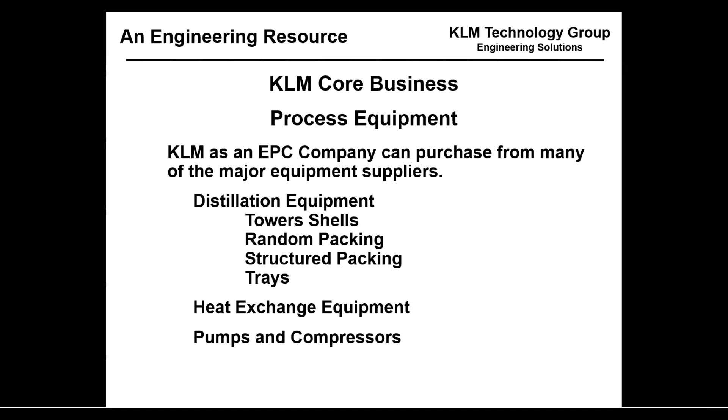Distillation equipment can be ordered with normal lead times or can be sourced for immediate replacement. KLM has a stock of random packing in Malaysia for immediate replacement. KLM has a stock of structured packing in Malaysia for immediate replacement. The shipping time should be short, and we also have some tray hardware in Malaysia, a stock of tray hardware.

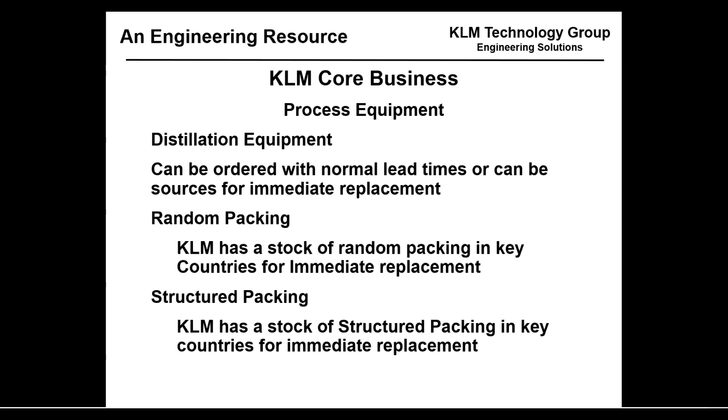KLM buys a large volume of process equipment each year because we buy many heat exchangers, pumps, and distillation equipment for many end users. Many times our cost to the end user is lower than they can negotiate themselves because the end user may be only buying a few items per year and the vendor adds a large profit margin.

Be sure and let KLM bid on your projects. We bid on a job and our competitor bid 100,000 and we bid 80,000 US dollars. They were 20% higher than us because they felt like the end user had no choice. So we were 20% cheaper than the competitor. Be sure and let KLM bid on your projects.

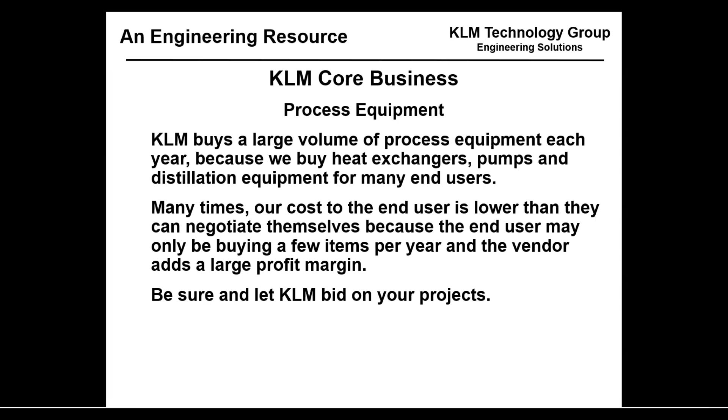Let's talk a little bit about distillation in general, and then we'll talk about random packing, structured packing, and then we'll talk about some distributors.

There are rules for which distillation device should be used based on pressure, flow, and fouling tendencies. For pressure, for high pressure applications, trays should be utilized above 150 psi, above 10 bars. Tray efficiency increases as pressure goes up, whereas packing efficiency decreases. There's a back mixing effect for packing at high pressure, so it's difficult to guarantee the efficiency at high pressures. Tray efficiency can be guaranteed at high pressures.

For low pressure applications, 1 bar and vacuum systems, packing has a much higher efficiency and can be guaranteed because you don't have this back mixing effect.

So I had a young engineer and a vendor was guaranteeing packing at high pressure. And I said, no, he's really not guaranteeing it. He told me he would guarantee this HETP. I said, well, call him in. Let's ask him. And so we called him in and he said, well, we expect that. I said, no, she understood that you were going to guarantee it. So you need to put it in writing. Of course, he wouldn't put it in writing because there's this back mixing effect. And so she was very angry at the young gentleman because I'm pretty sure he had told her it was a guarantee. He told her verbally, but he wouldn't put it in writing.

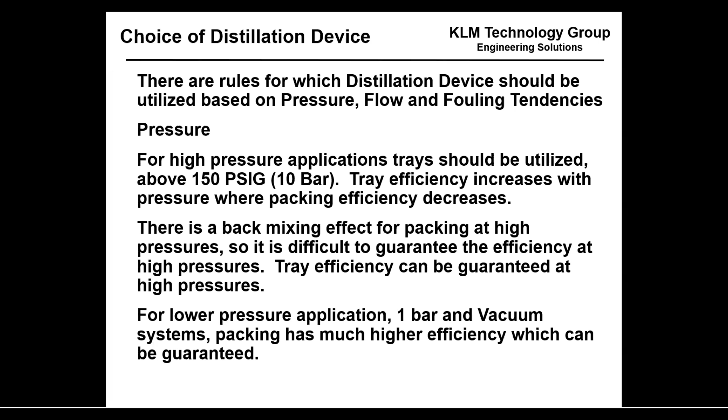Flow, for pressure above 10 bar use trays. If it's vacuum or low pressure, you almost always use packing. For flow, high flow parameters, trays are preferred. For low flow parameters, packing may be utilized, may be preferred.

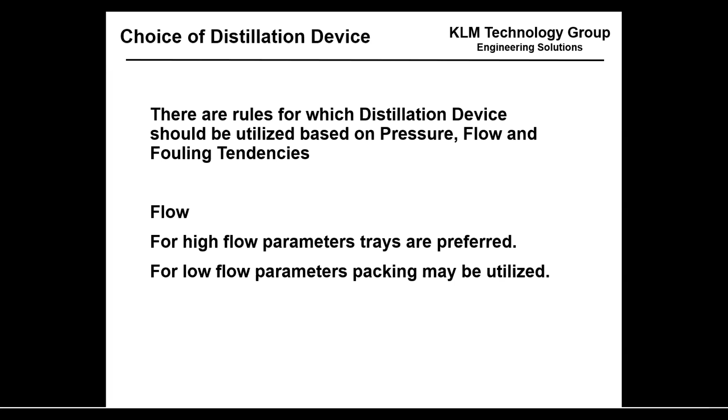Fouling tendencies. For a high fouling system, a well-designed anti-fouling tray is the best option. I probably need to put one of these presentations together about what a good anti-fouling tray looks like. With proper distributors, and we're going to talk about distributors a lot today, structured packings have worked well in refinery vacuum towers, which are highly fouling services. So structured packing and very good distributors have worked well in one of the most highly fouling services, which is a refinery vacuum tower.

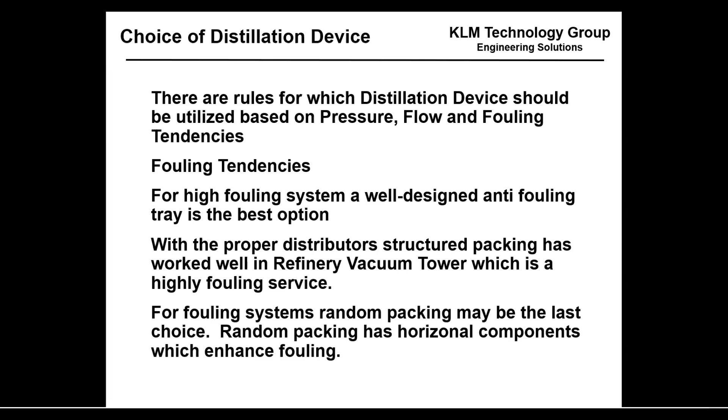For fouling systems, random packing may be the last choice. I'll use trays first, I'll use structured packing, and then I'll use random packing last. Random packing has some horizontal components, so if one of the random packing pieces is horizontal, it'll be a place where fouling can start. So you may not want to use random packing in highly fouling services.

Let's talk about the advantages of structured packing, and we'll also talk about the advantages of random packing.

One advantage of structured packing is that it's unique in that the top two layers act as a continuation of the distributor to distribute the liquid more evenly. So even if you have a bad distributor, which most distributors really are poor, structured packing's top two layers help redistribute the liquid. This results in excellent liquid distribution, leading to overall higher efficiency than random packing.

Random packing does not have these top two redistributing layers. In offshore applications, there's motion and tilt, which is an important consideration. If you have tilt, the liquid will start running down one side of the column, and with structured packing, it will redistribute in the first two layers as you go further down the column.

The liquid tends to go to the wall, and the vapor tends to go up the middle. So in very large beds, with either random packing or structured packing, the last several meters are less effective.

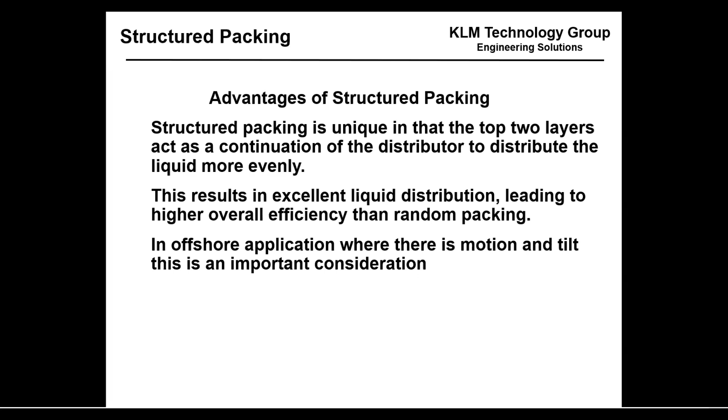Structured packing has very high efficiency in low pressure applications. So if I have a low pressure application, trays are good, but structured packing might almost be better. This equates to a high number of stages for the same height, so more stages means you can use less reflux and have energy savings. If I have an atmospheric pressure or vacuum system, I'm almost going to use structured packing.

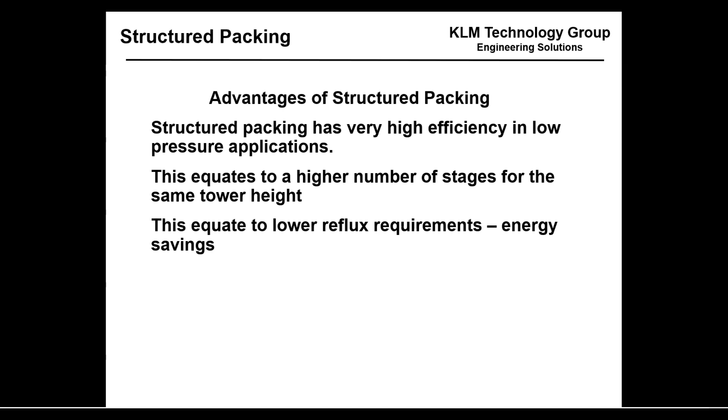If I have very clean surfaces, I'm going to use random packing. Or if I have a very small diameter, I'm going to use random packing. Structured packing has higher capacity than trays in low pressure applications, equating to reduced tower diameters and higher operating rates in the same column.

So if I'm limited in a certain section of a column, say I've got a crude column and the diesel section is limiting the whole column, I can put packing in that diesel section and the whole column's rates can come up.

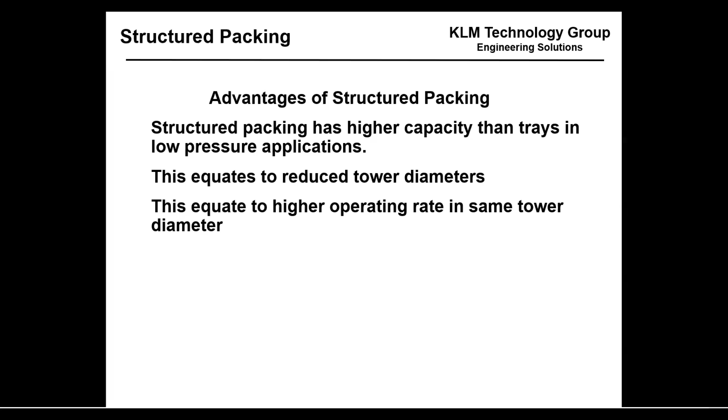Structured packing offers low pressure drop compared to trays, lower bottoms temperature, higher separation of difficult separations, low energy consumption, and less foaming. So there are several advantages for structured packing.

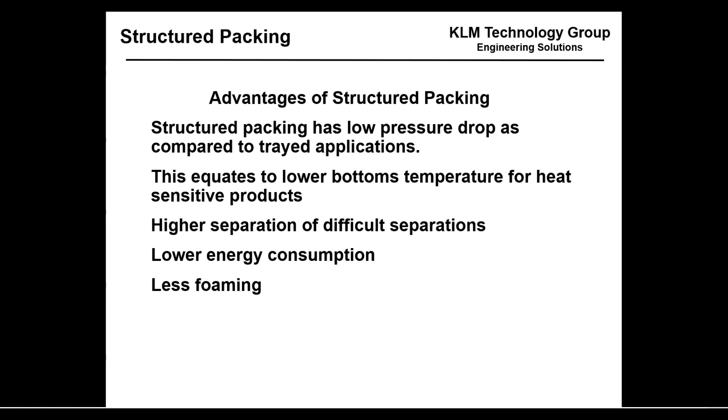Structured packing has a lower fouling rate than random packing. There are no horizontal areas where fouling can begin to multiply, resulting in longer run lengths and less residence time than trays.

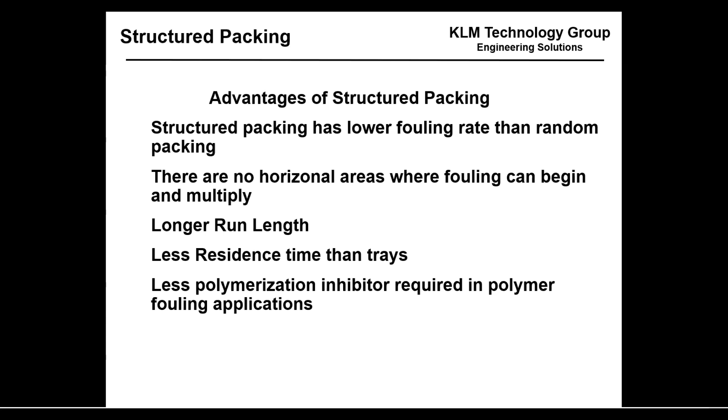For example, styrene has polymerization issues, so in a styrene column you'll add a polymerization inhibitor. But because structured packing has less residence time, lower pressure drop, and lower temperatures, less polymerization inhibitor may be required in polymer fouling applications, particularly in styrene.

Structured packing has multiple styles. There's some made of sheet metal and some made of wire gauze. There are multiple textures of sheet metal - some have holes and some do not. The most commonly utilized is sheet metal with textured dimples to increase wetting ability and small holes to increase distribution.

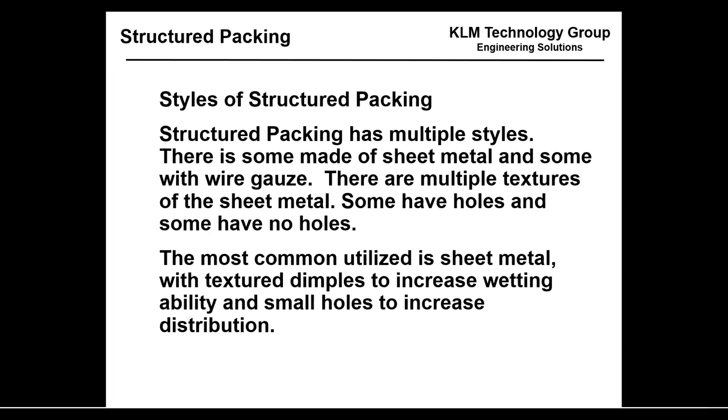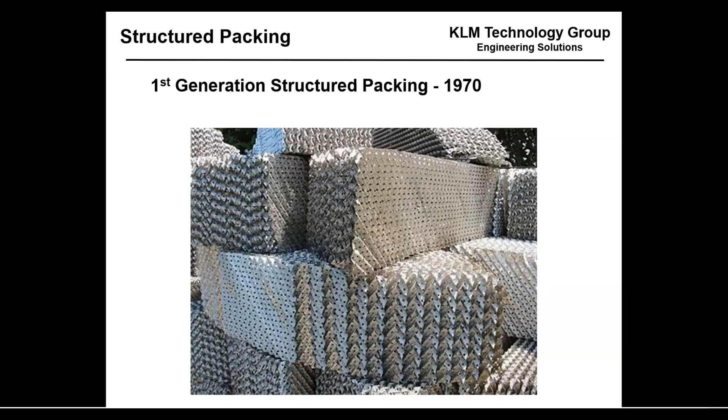But it typically looks like this. It was invented in 1970, and it works very well in atmospheric, low pressure systems. It doesn't have very many horizontal components, so it's fouling resistant.

Structured packing is sized based on the area, meters squared per meters cubed. There's a trade-off between capacity and efficiency for the different sizes of structured packing. The number of theoretical stages per meter is an indication of efficiency - the larger the area, the smaller the capacity, but the higher the efficiency.

When something is very important and you're in a presentation, they tell you to put it in red. So these numbers of stages per meter are for atmospheric and vacuum pressures with very good liquid distribution - we're going to talk about what's considered good liquid distribution.

90% coverage would be okay. You can get up to 95% - that would be 95% efficiency of your distributor.

So a 200 area, which is 200 meters squared per meter cubed, has fairly wide openings - you might get 2 stages per meter. 250Y, which a lot of people use, gets 2.5 stages per meter. 350Y has a lot more metal, so it's more expensive - it'll have more efficiency but less capacity.

500 is going to have a whole lot more metal, so it'll be more expensive - might get 4 stages per meter, but your capacity is going to be less. A lot of people will use 250 or 350. KLM has the ability to sell you 300 - so if you're in a revamp situation and 350 won't work, we can actually make 300Y.

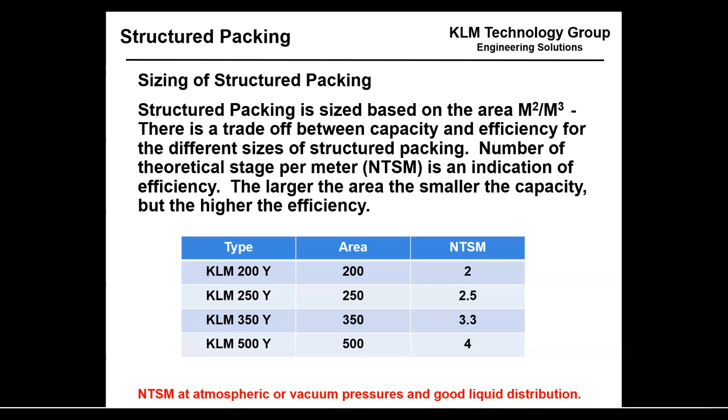Packing works pretty well. It's the distributor and the bed heights that cause people problems. So we'll talk about that.

There are 2 types of angles for the rows of sheet metal, X and Y. X has a degree of 60 degrees, a lower pressure drop, and higher capacity. It may be used in high flow areas like pump around sections.

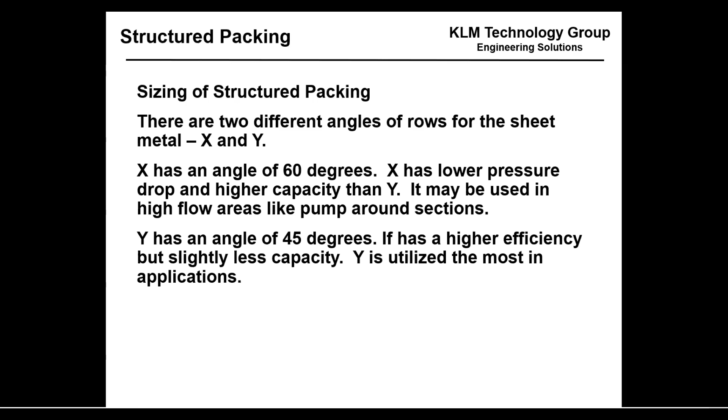Y has an angle of 45 degrees, is higher efficiency but slightly less capacity. Y is utilized the most in applications, so 250Y is probably the most used type of packing.

Second generation structured packing was introduced in the 1990s. It has a straightened area at the interface between the layers of packing. Instead of the interface being at 45 or 60 degrees, the interface is matching.

This simple change to the packing resulted in a 25% to 40% increased capacity at the same efficiency. Today, most new columns are utilizing second generation structured packing, which was patented in the early 1990s.

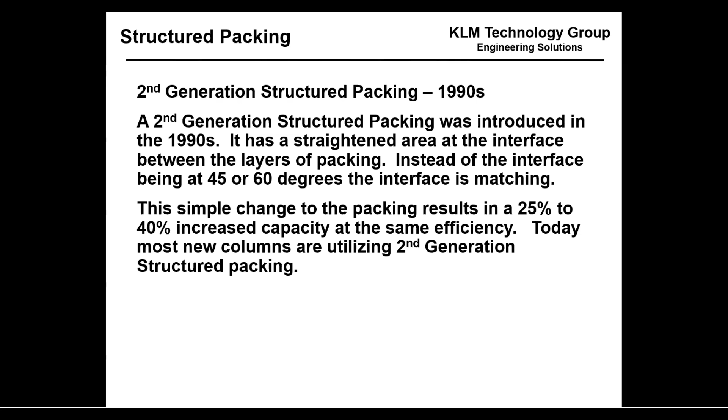A patent is good for 17 years, so before the 2000s the patents ran out. Second generation structured packing has been open art since 2000, and it's roughly the same number of stages, but with 125 to 140% more capacity.

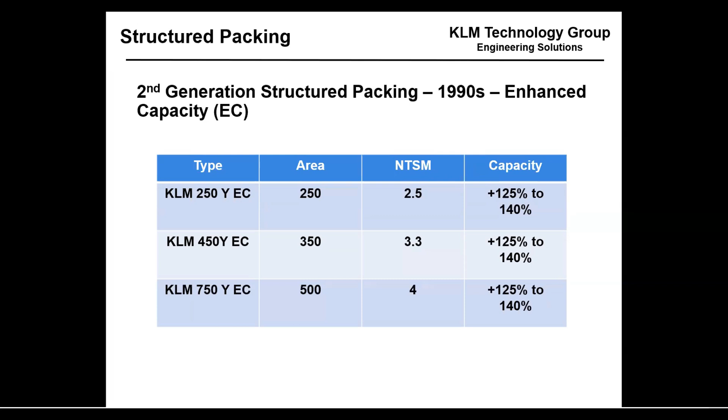Let's talk a little bit about random packing. Random packing has a low pressure drop as compared to tray applications. This equates to lower bottom temperature for heat sensitive products, higher separation for difficult separations, lower energy consumption, and less foaming. For really clean service, random packing is excellent when you have a small column.

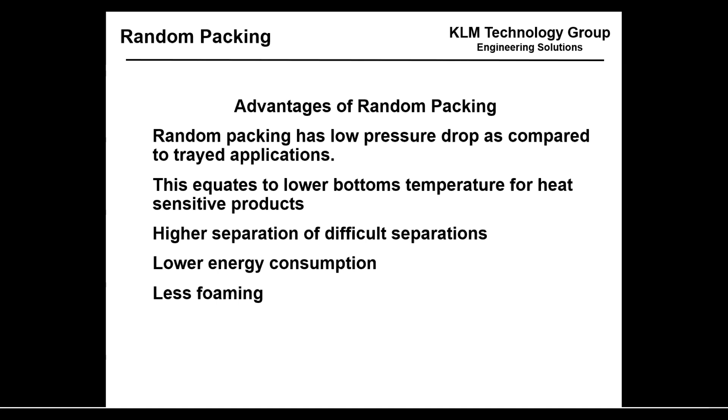Random packing is good, so these are places you should use random packing: higher energy savings, higher number of stages. Again, in the top of a crude column, in naphtha splitters, and certain relatively clean services where you could use random packing.

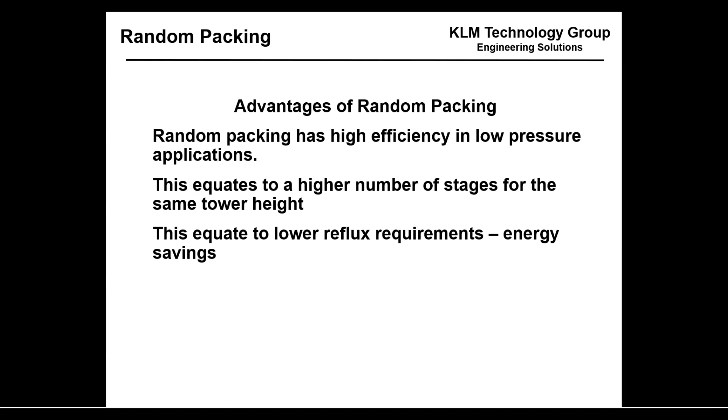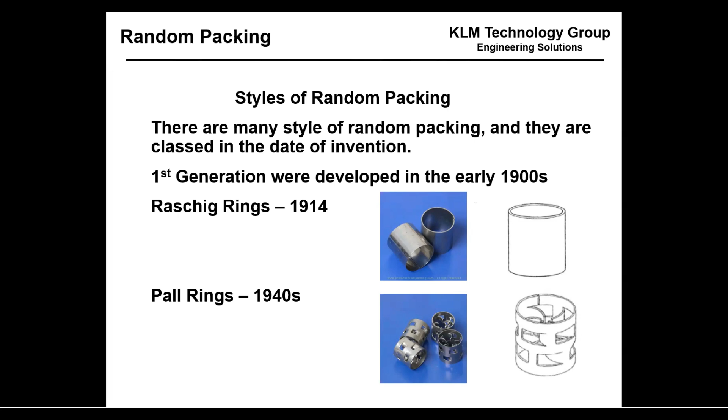There are many styles of random packing. By 1914, Raschig rings were developed. In the 1940s, Pall rings. In the 1970s, I-type rings. In the 1980s, improved Pall rings.

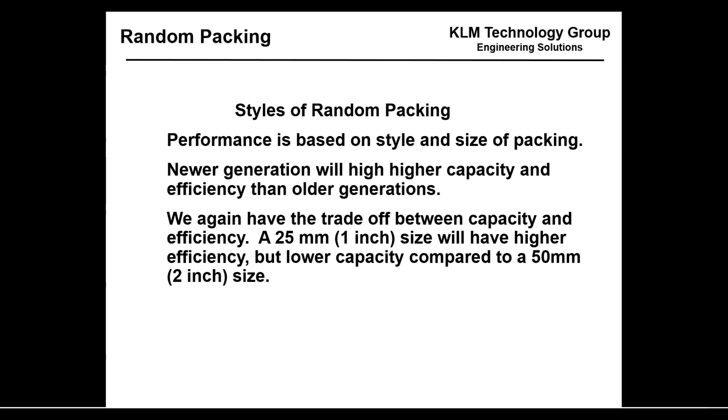Performance is based on style and size of packing. Newer generations will have higher capacity and efficiency than older generations, but again there's a trade-off between capacity and efficiency. A 25 millimeter will have higher efficiency but lower capacity compared to a 50 millimeter, 2-inch size.

The I style may be the best from a cost and performance matrix, so if I'm going to choose, I'm typically going to choose an I style type of packing. A 1-inch might be 2.5 stages, and a 2-inch might be 1.7 stages.

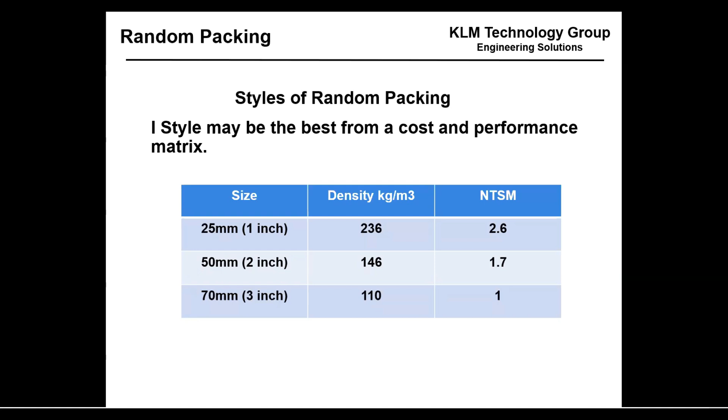So roughly for structured packing and random packing, with low pressure and good distribution, you get about 2 stages per meter. That's just a good rule of thumb, and that's about where you're going to be.

Improved Pall ring, style H improved Pall ring - these were all different years, different styles.

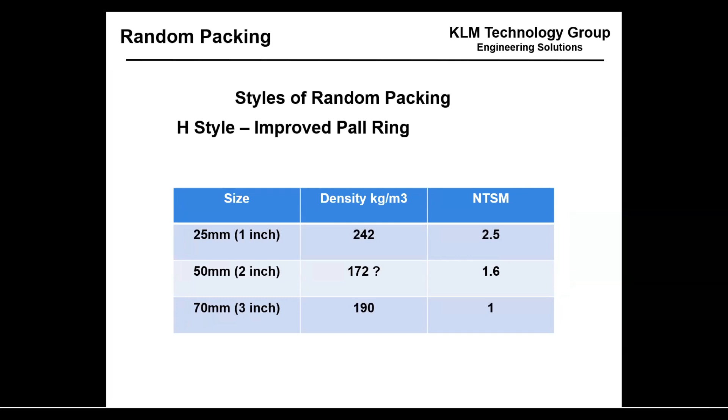Let's talk about bed heights for a minute. As you go down the bed, maldistribution increases, and maldistribution can reduce efficiency by 50%.

So where you think you've got 2 stages per meter, at the bottom of the bed you might only have 1 stage per meter. The liquid tends to move to the column walls, and the vapor travels up the middle, reducing the mass transfer. And again, there's this trade-off.

What is the best bed height to install a collector and redistributor? The fewer the collectors and redistributors, the shorter the column, the lower the capital cost. But the efficiency of the packing decreases, leading to higher operating costs.

So there's a trade-off between CapEx and OpEx. I can put less collectors and redistributors and have less capital cost, but use more energy. So there's a trade-off between the two.

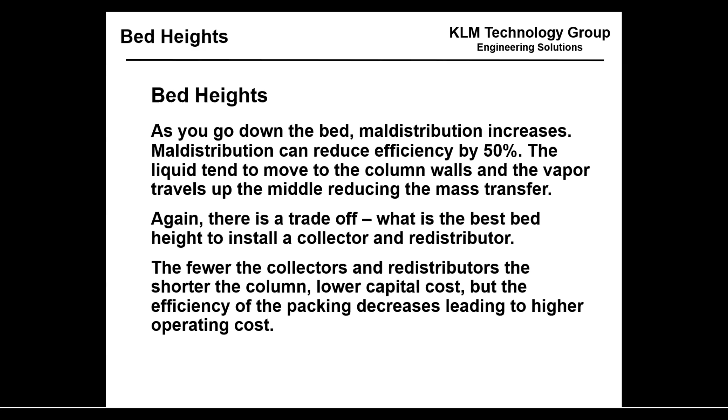The collector has 2 functions: to collect and mix the liquid from the bed above, and then to redistribute the vapor. Remember, the vapor is going up the middle. Some collectors in small columns actually do not redistribute the vapor very well, and there are multiple papers on this issue. You got to be real careful in small columns that the collector doesn't disrupt the vapor flow even more.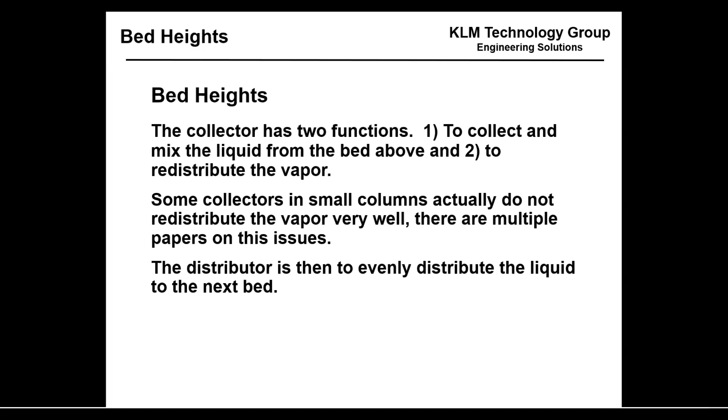So there's multiple papers on this. I want to collect the liquid and mix it because it's got different compositions, and then I want to redistribute the vapor. There have been incidents where the collector has actually blocked the vapor, and there's a whole range of papers on this. Then the distributor is to evenly distribute the liquid to the next bed.

So what are some general bed guidelines? In general, the guideline is do not exceed 15 theoretical stages. If a good assumption is 2 stages per meter, so you have about 7.5 meters or 25 feet.

Today, many vendors are going to 10 meters, but you'll get limited mass transfer in the last few meters, so you're probably only getting half the efficiency - about 1 meter per stage.

Columns containing less than 5 theoretical stages per bed are relatively insensitive to liquid maldistribution. This would be a short bed of about 3 meters or 10 feet, so with short beds you really don't have to worry about the liquid maldistribution.

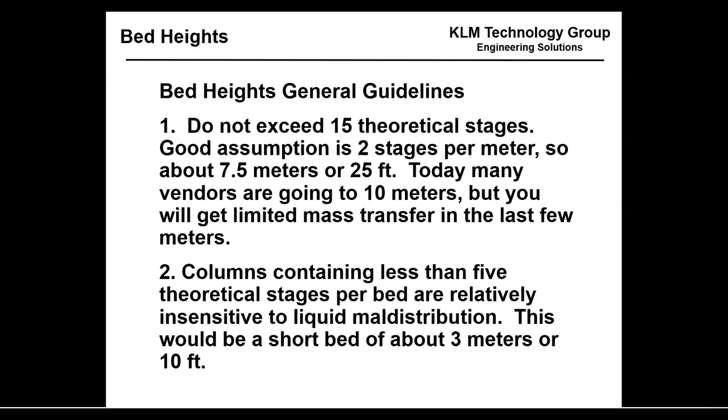With 10 or more stages per bed, when you get up to 10 stages, so above 5 meters or 16 feet, maldistribution becomes an issue. So if I'm building a column from scratch and it's not too high, I may go with 5 meters.

Many authors recommend that you not exceed 3 meters for Raschig rings, or 6 column diameters, or 12 diameters for Pall rings.

Because you use random packing in a small column, you start to get wall effects. So you really don't want long beds in there. And the packing size should not be greater than 1/8 the column diameter. So I don't want to put big packing in a small column. I want you to put small packing size in a small column. So these are bed height general guidelines.

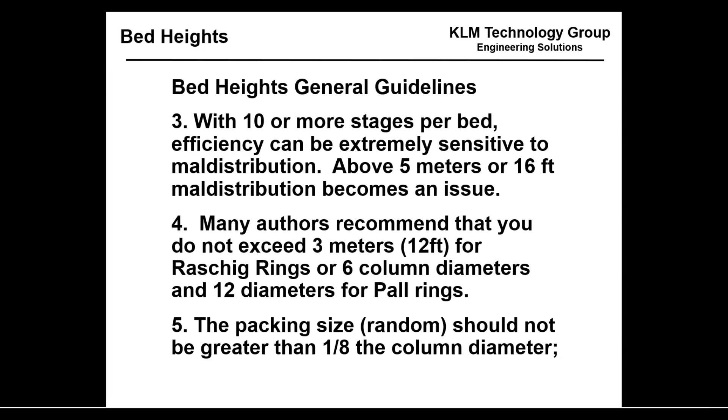Distributor quality. So I want to do a cost analysis on how long I want my bed. I've got a capital cost versus energy cost. If I have more collectors, I've got more efficiency, I've got higher purities, but the more collectors cost me money. So I've got to think about that.

Distributors, same thing. For packing systems, every designer will mention that the packing only works as well as the distributor. And then they normally provide a not optimized distributor. Good normal industry standard distributors average about 92% distribution quality, which is not good, but not bad. Below 90 is considered poor. Many are below 80%. 94, 95 is achievable. We'll have an increased cost.

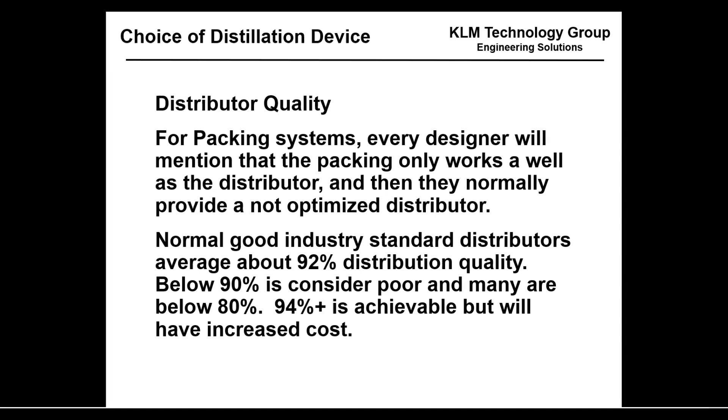For structured packing, you can get away with a poor distributor. Don't know why you would want to, but you can, because the top 2 layers will help you redistribute. But you're losing the efficiency in the top 2 layers if you don't have a good distributor. If you search on the internet, you could see many distributors with very low efficiency.

Many look below 80%. So next time you look at a distributor, you think about the pattern of liquid that's going to be on that top bed of that packing. And you think about the percentage of coverage.

Here's some pictures from our friends at Wellchem. They have hydraulic software and distributor software. So here's a pan distributor. Pan distributors are not good for fouling services, because if you have fouling, the holes in the bottom will foul, and then you'll have even worse distribution. But they have medium quality distribution.

If you look, you can see the rings, the circles of the holes, and you can see fairly large areas where there's no liquid there. This distributor might have 80 or 85% efficiency coverage. So I'm really not a fan of pan distributors. I usually don't use pan distributors. They're not good for fouling services, and they have a medium quality distribution, but they're cheap.

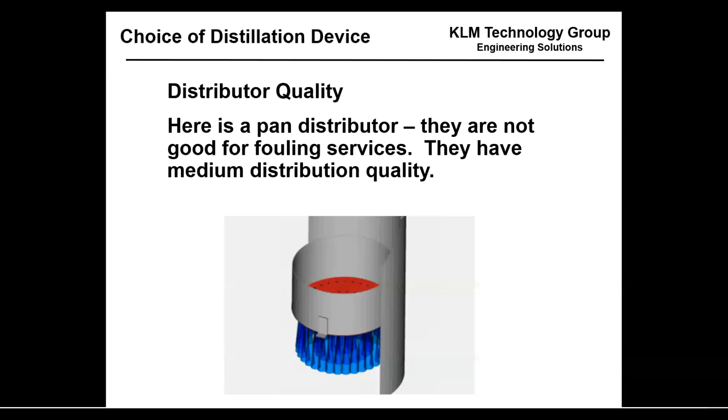They're cheap. Here's a trough distributor. Typically, this is what I use. Notice the better distribution quality. It's easily, this one's probably 90%. It could be optimized, it could come a little further to the wall. So this is an okay distributor.

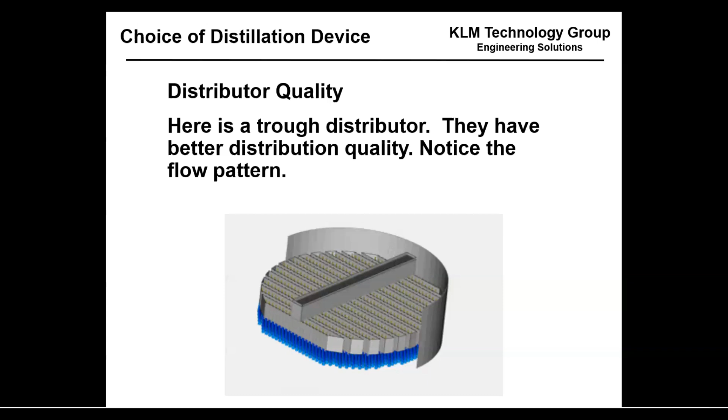This is probably the minimum I'd want for random packing. I definitely wouldn't want a pan distributor for random packing. And this is a deck distributor. It even has lower distribution quality. So you're looking at this, it's got well below 80% distribution quality.

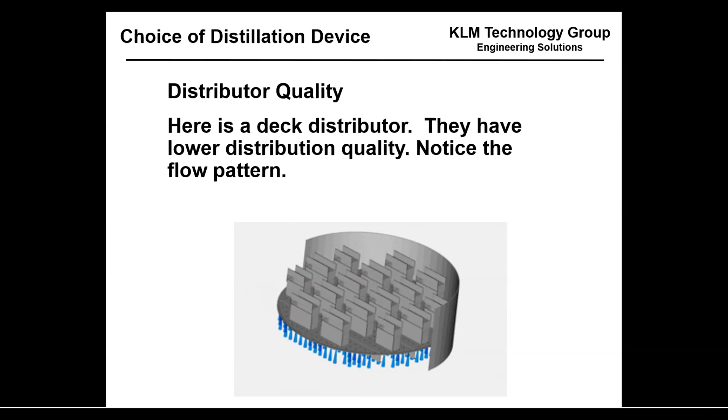So of course it's cheap and of course you're not going to get much. So if I put a deck distributor with a long bed, I've asked for troubles. I've asked for maldistribution. KLM always tried to give good bed heights, and we try to give good distributors.

For structured packing, the top two layers redistribute the liquid. Each layer is 300 millimeters. You have a 3 meter bed. You lost efficiency in the top two layers, which is 20% of the bed height. So even with structured packing, I'm gonna try to give you a good distributor. I'm gonna try to give you this 95% distributor. So you won't lose that efficiency in the top of the bed.

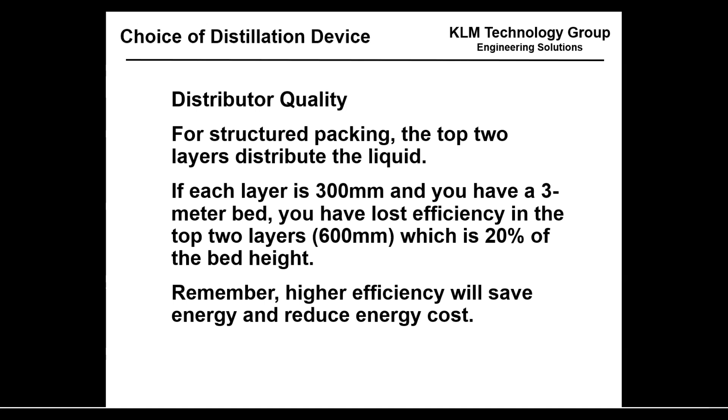Higher efficiency will save energy, reduce energy costs, give you higher purities of your products. For random packing, the packing will help some, but not like structured packing. It is more important to have an optimized distributor for random packing to increase efficiency and reduce energy. I'm going to try to optimize the distributor design to gain as much distribution as possible to improve the packing efficiency, reduce energy, save money. Energy is $4 per million BTUs in the US, and it's $15 per million BTUs in Asia. It does not take much energy savings to be real money.

So an easy thing to do is go look at your distributors. From the pictures I've shown you today, you can look and tell whether you've got a good distributor or not. If you don't have a good distributor, you come to KLM and we'll build you a new distributor. Distributors are not very expensive, and they will pay back in energy savings quickly.

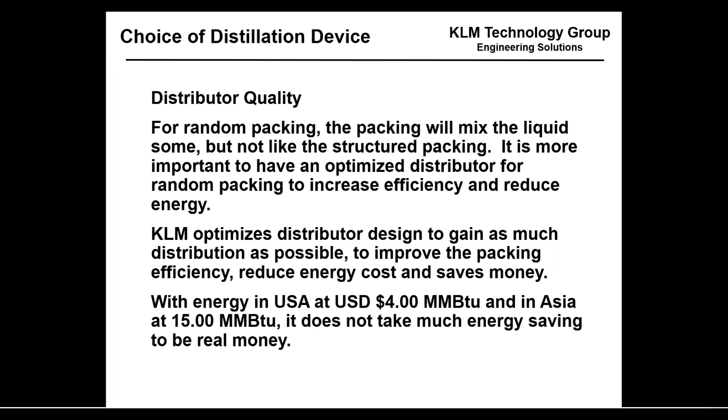Quality suppliers, buyer beware. There are hundreds of random and structured packing suppliers, some at very low cost. KLM only buys from quality suppliers that we have vetted.

Suppose you're buying random packing and the thickness is 0.3 millimeters. A low-cost vendor provides you a thickness of 0.28, which is difficult to measure, and his raw material cost is 6% lower. If you have a large bed, the crush strength of the thinner packing is lower and the bottom of the bed might be crushed, leading to high pressure drop. So you saved money, but he deliberately bought thinner material, and his raw material cost is 6% lower.

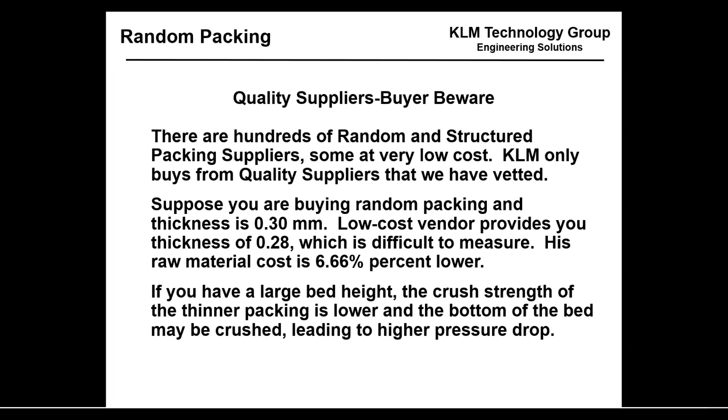Suppose you're buying random packing and the size is 25 millimeters. A low-cost vendor might provide you packing with 27 millimeters, which is difficult to measure. Packing is sold in 1 meter bags, and the bag should be full and weighed. Again, his raw material cost, by the packing being just slightly bigger, is 3 to 5% lower. So he gets 6% on the thickness, he gets 5% here, he's got 10% lower cost.

Larger packing will give you more capacity, but less efficiency. If your energy cost is low, this should not be a large effect, but most companies do not have low energy cost. So you need to make sure you're buying the right thickness and the right size.

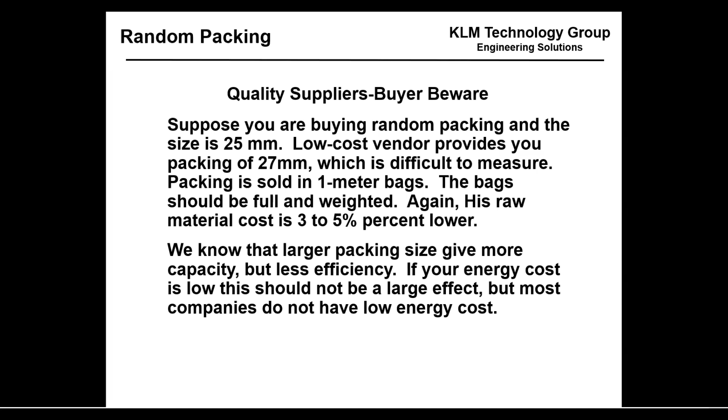I talked to a gentleman last fall who had been buying higher priced structured packing, and his purchasing team wanted him to buy the lower price packing, which he did. It lasted only half the time as the previous packing. So I'm sure it was thinner, and it was probably the wrong size, and probably the wrong metallurgy.

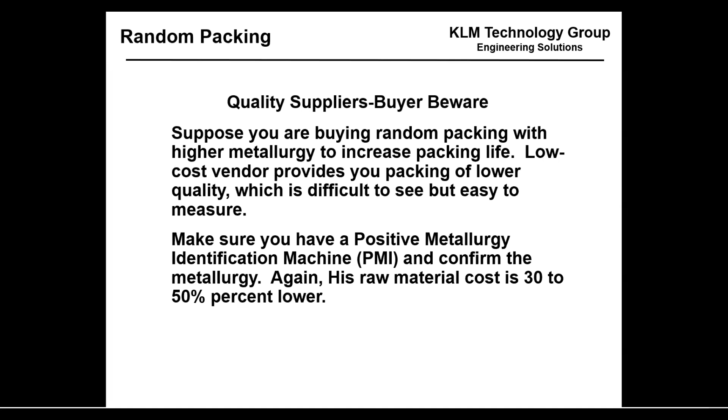So make sure you buy from quality suppliers. With energy in the US at $4 per million and $15 in Asia, it does not take much money to see real energy savings, and there's a good reason someone's packing is lower cost - it may not actually save you money. At KLM, we make sure we buy very high quality packing that meets or exceeds OEMs.

Equipment installation. KLM can design and supply the very best distillation internals. We can give you the best packing, we'll give you the best distributors, but if they're not installed correctly, the capacity and efficiency will be reduced.

Many organizations do not have experienced tower inspectors because they only enter the towers on a 3 to 5 year basis. KLM is happy to provide senior tower inspectors to assist your turnarounds and tower reviews. I'll send a senior guy that's worked with me a long time, and if he's unhappy with something, I might even show up. So we'll be happy to provide senior tower inspectors.

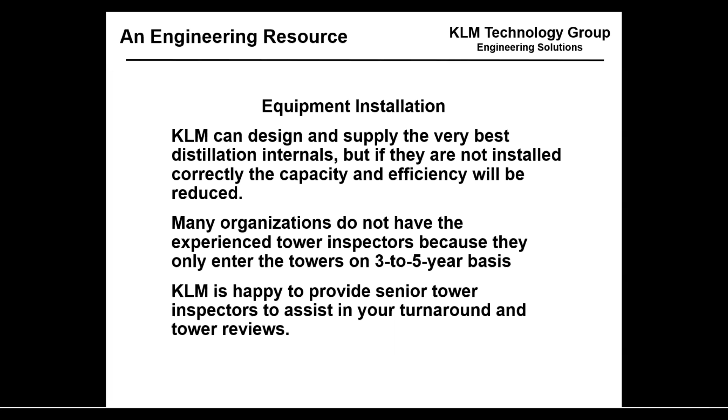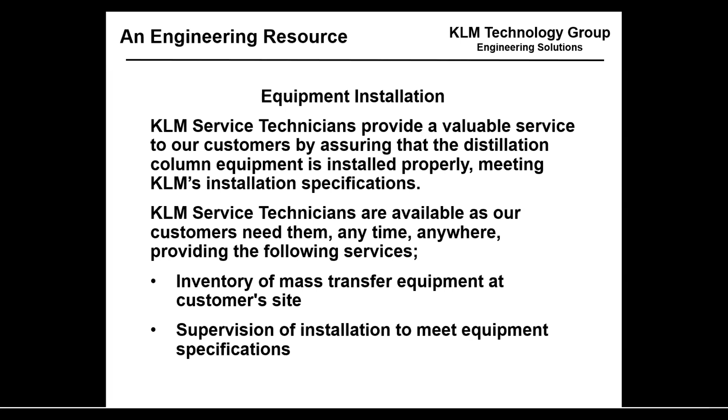KLM service technicians provide a valuable service to our customers by assuring that the distillation column's equipment is installed properly, meeting KLM's installation specifications. KLM service technicians are available whenever our customers need them, anytime, anywhere - for inventory of mass transfer equipment, supervision of installation to meet equipment specifications. We can look at assessment of new and replacement equipment, existing mass transfer equipment, installation, expediting and troubleshooting, turnaround, and installation consulting.

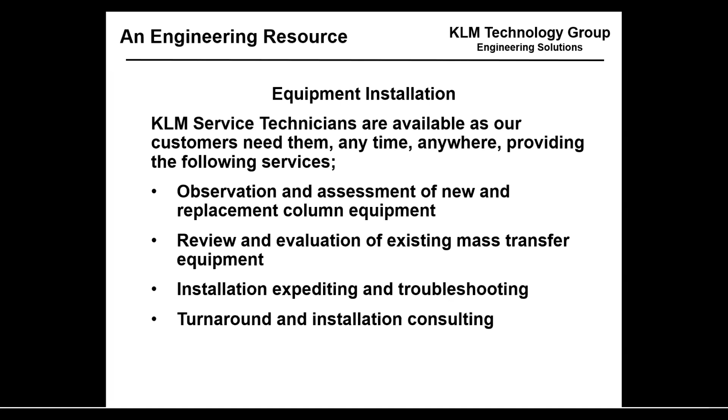Column hardware, trays, and different things can be ordered with normal lead times or can be sourced. We've got a stock of column hardware in Malaysia for immediate replacement. If you need some column hardware, we can deliver tomorrow if you're in Malaysia, and probably in 2 days if you're in Thailand or Indonesia.

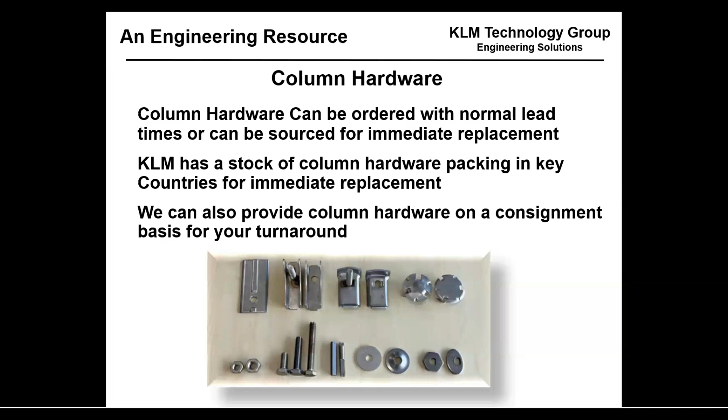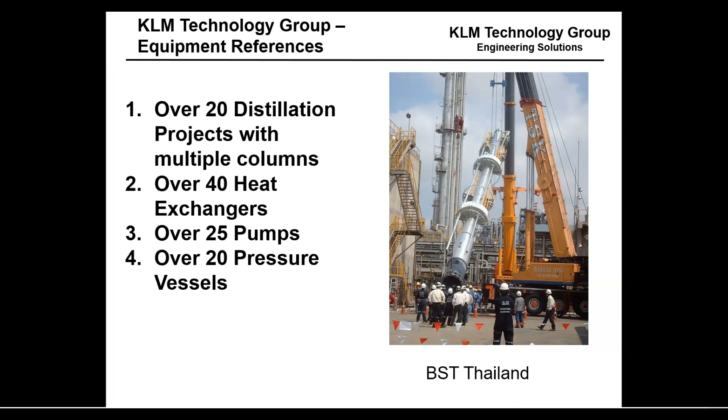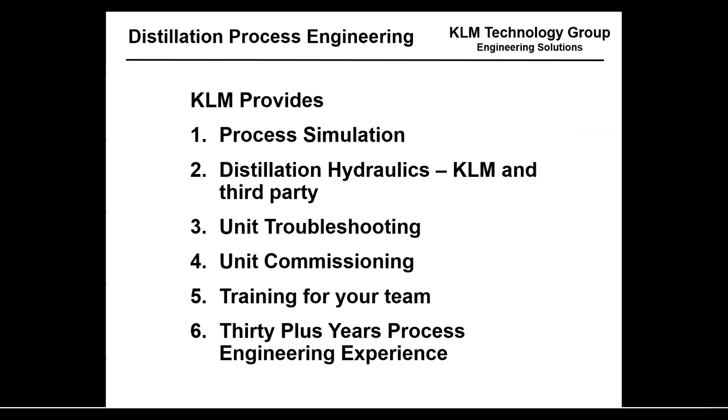We provide process simulation, distillation hydraulics, KLM and our third party unit troubleshooting, unit commissioning, and training for your team - 30 plus years.

Solid track record of projects in Southeast Asia since 2005, strength in process engineering, distillation equipment supply, heat exchanger and pump supply, strong partnership, mechanical engineering, fabrication, wide range of services, ready to assist for your next project. Thanks for your time today.